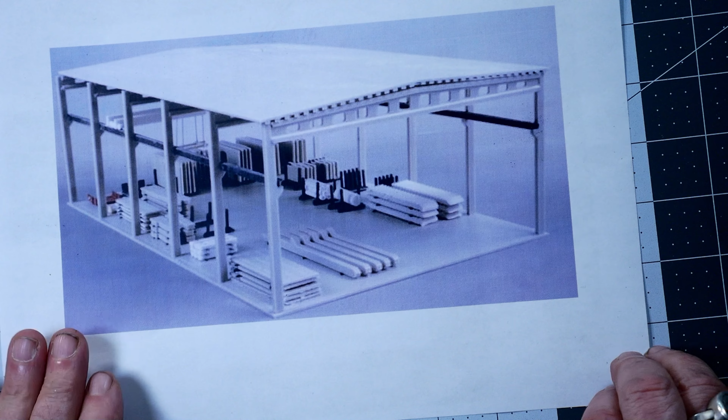Which is honkin' expensive. Just give me a sec here, I'm going to tell you exactly what that is in currency. Sorry, there's dead air right now. Okay, 39 euros is $57.45 Canadian.

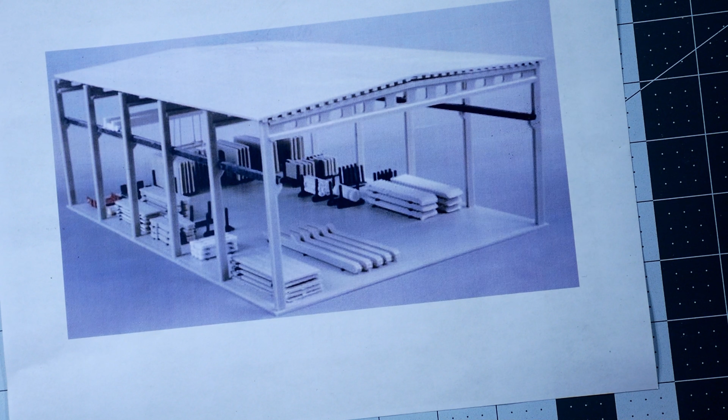That's an awful lot for a building I can build for $4 with a laser cutter. Of course, I had to buy the laser cutter, so it cost a bit more, but it gets used over and over for my buildings, because buildings are mostly flat panels. When I want curved parts, I usually 3D print those, but otherwise I'm building flat panel siding and other stuff for my layout.

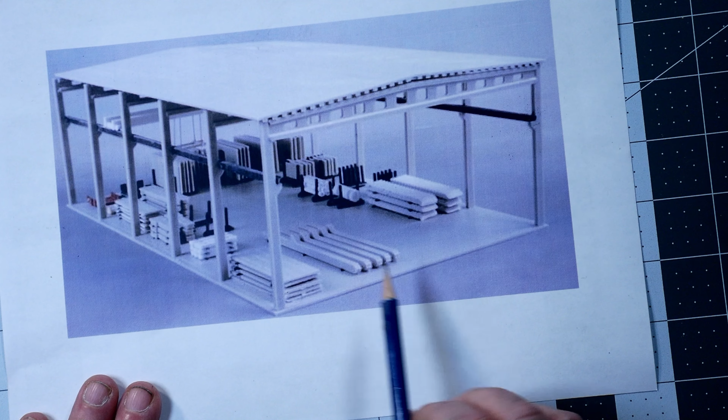This particular image caught my eye, and I thought, well, that's it. I think I saw on Ron's Trains and Things he had a repair in place building similar to this structure, and I thought to myself, why not do that?

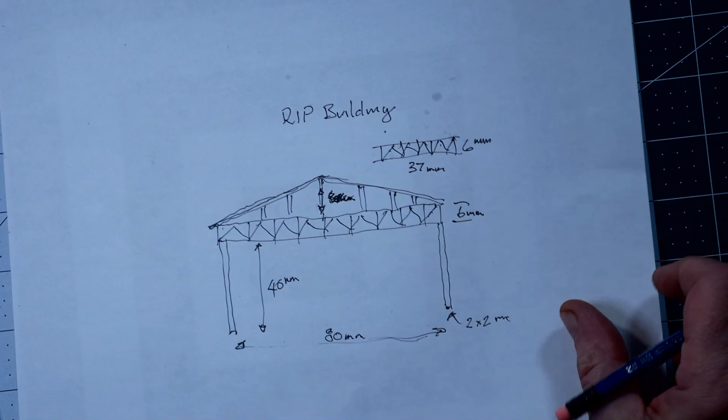So the first thing I did, and I'm just going to switch out the paper here, was make a quick sketch and decide how wide it had to be. In order for it to go over two tracks, it has to be 80 millimeters. Sorry, yes, it's 80, just have to check on a ruler here.

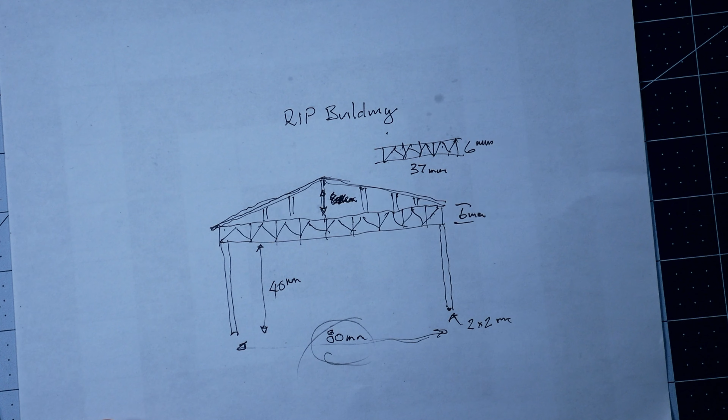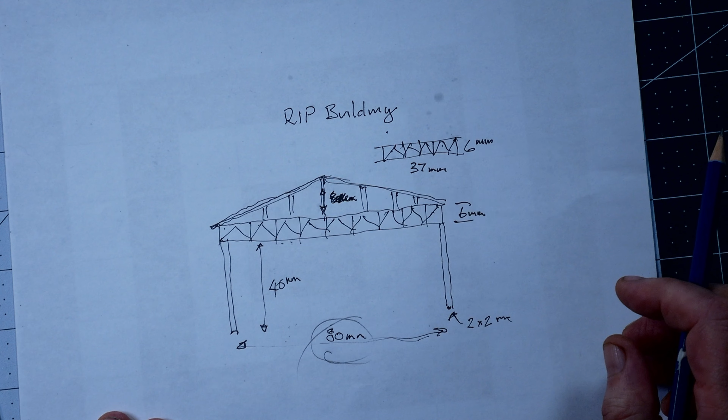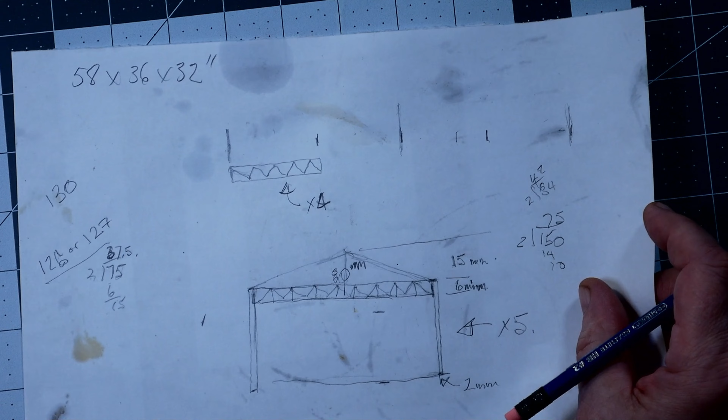In order for diesels and rail cars and rolling stock to go underneath, from the ceiling or the girders to the ground has to be 40 millimeters, sorry, millimeters not centimeters - we're looking at N scale. So I did this quick drawing, actually twice. I did it once in pencil, then thought you wouldn't be able to see the pencil much, so I did it over again in ink.

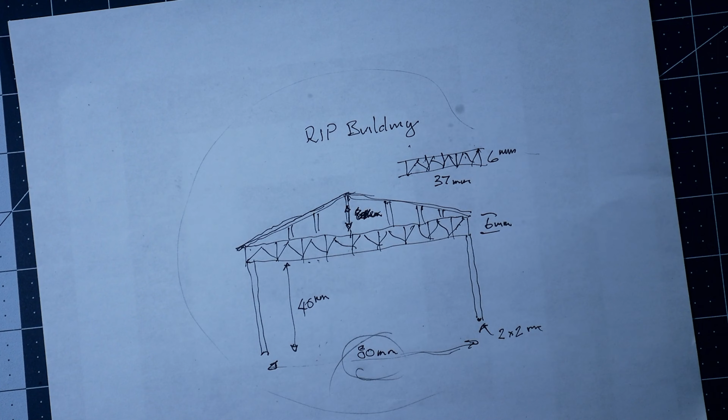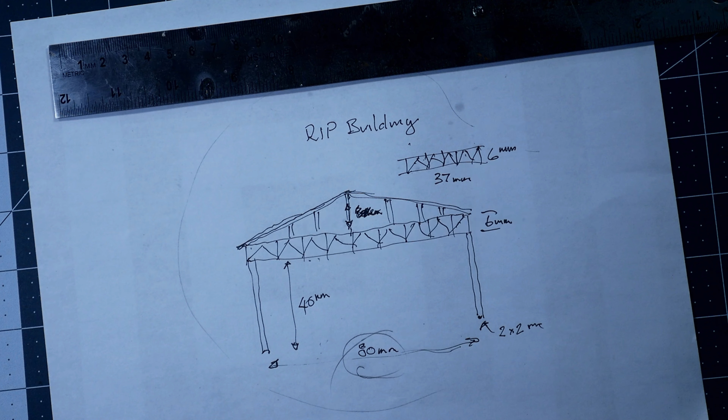There are a couple tools you'll need to do this. First off, you'll need a ruler in centimeters, an N-scale ruler, some calipers, and I think that's all you really need for this job. And of course a pencil and stuff like that.

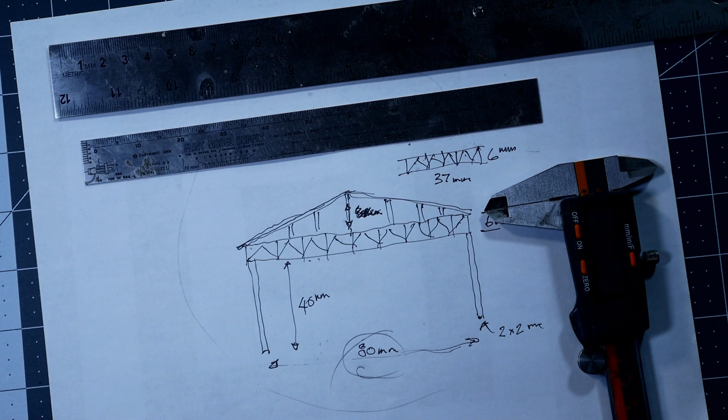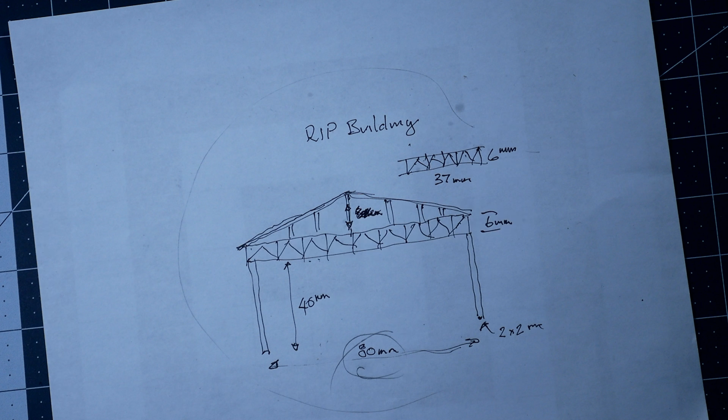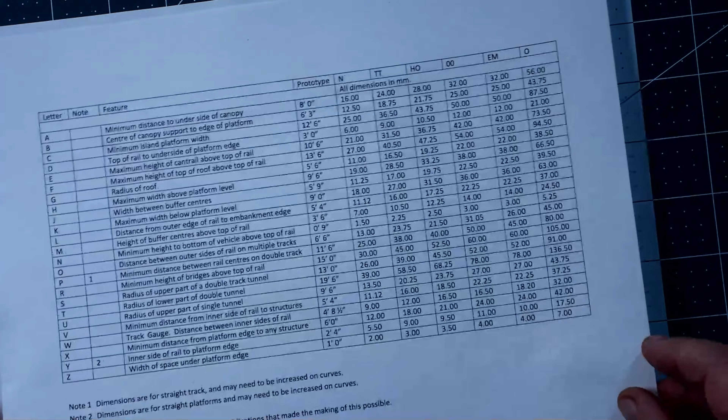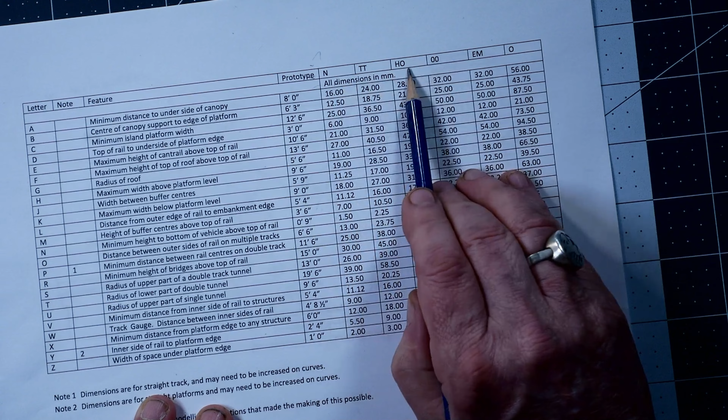But anyway, one of the first things I wanted to do was make sure all my clearances were correct. On Railway Scenics, which is a UK company, they have a free download, and I'm going to sit it here for you - a free download of all the dimensions you need for clearances for rail cars. These are all in millimeters. They provide a chart that goes with the diagram, and the chart has prototype distances, then N scale, TT, HO, OO, EM, and O scale.

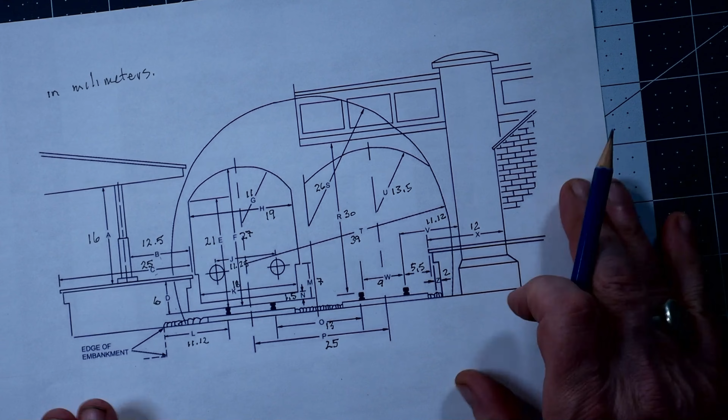So you can take this and do what I did. I took all of the N scale sizes and wrote them beside the corresponding letters. Now I'm either going to laminate this, or do something with it to keep it good, because now I have a reference for everything I build on my layout. That's why I got this chart, because I wanted to make sure I wasn't going to make a mistake here and waste material.

Now, wasting material - like I say, the whole building cost $4. I bought 1/16 sheets of basswood on Amazon, and I used that as my structure to cut out the building. Now the building is already cut out - I did that already, I'm not going to show you that.

I may demonstrate the laser. I do have a time lapse somewhere of the laser cutting things out, but we'll see how long this thing is before we start throwing in a time lapse here. So now I'm going to bring my computer down here, switch over to LightBurn, and show you how I do this - just so you get a quick tutorial and see how easy it is to do.

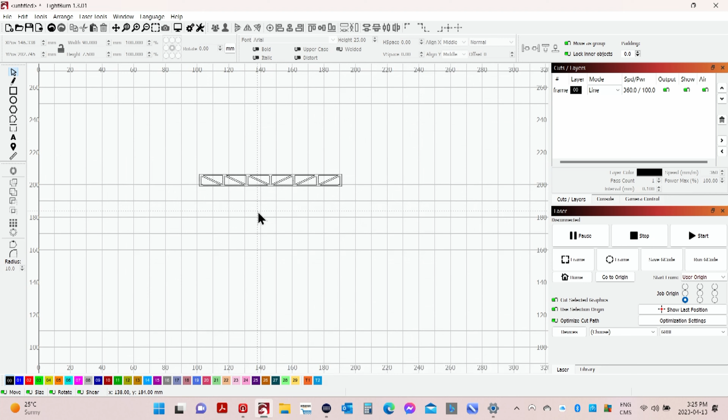A while back I made, I needed a set of trusses for a building that I was building. I believe it was the large shallow warehouse factory that's sitting on my layout in the yard, and I didn't want to go back and repeat that, so I created this truss.

So what we're going to do is look at my dimensions, and I'm going to zoom in a little bit so you can see it better now. I'm going to pick the tool, and pick it. Okay, so it's 90 wide, which is bigger than I need, so I'm going to change that to 80 and press enter, and that moves it in, makes it a little bit better. And I need it to be 6 millimeters tall. This is from the dimensions in that diagram that I got from Rail Scenics.

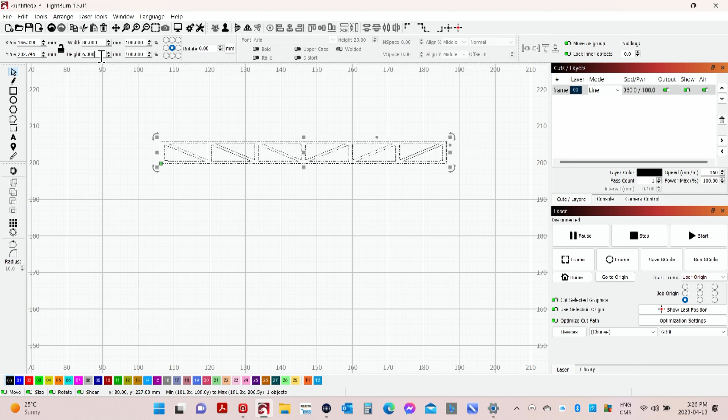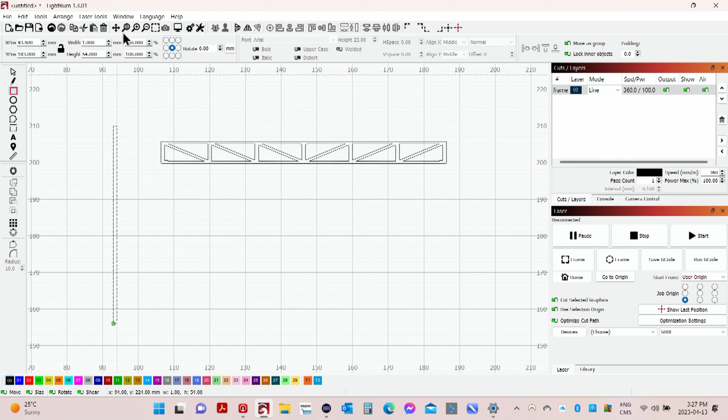So that's the start. Now I need 2 legs on this thing to keep this girder above the track. So I'm going to pick the box tool, and draw a box. Now I need it to be 2 millimeters, so I'm coming up here and change it to... there, 2 millimeters and 40.

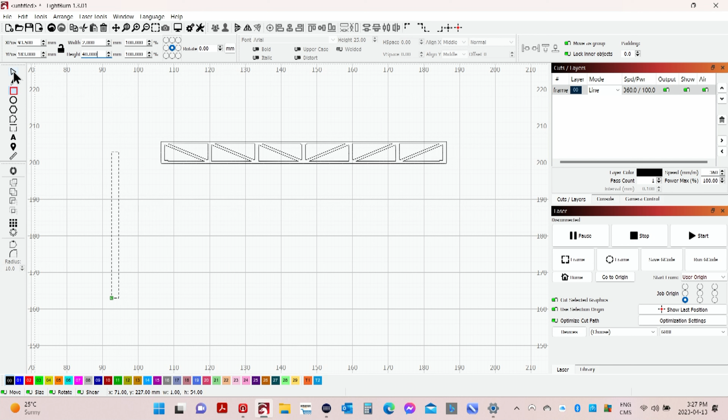Press enter. Okay, so now what I want to do, and we're doing this real quick so I'm not going to spend a lot of time here, is go back and take the pick tool, and move this over here, and zoom in. And I'm just going to overlap this upright with the girder.

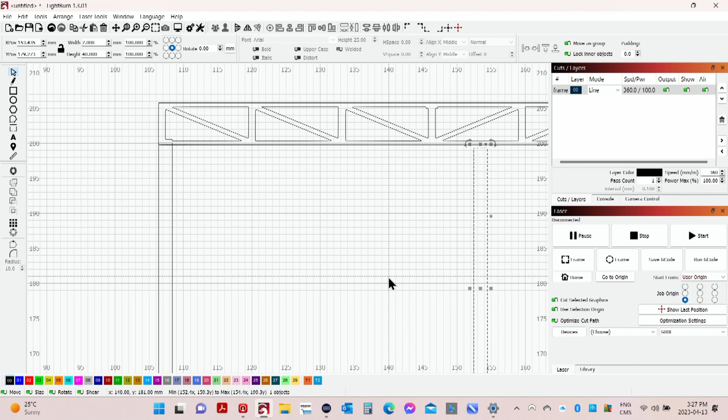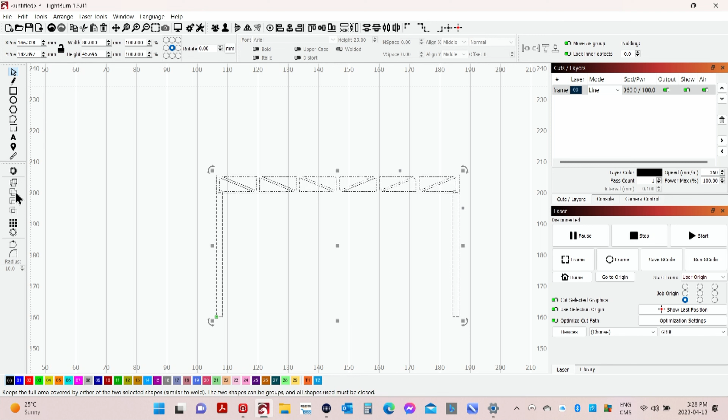And now I'm going right clicking on here, and I'm duplicating that leg, so I get exactly the same thing. I'm going to scratch it over here, same deal. Now I'm going to select all of this stuff, and click, and that has joined the legs to the girder, so it's one piece. So when it cuts, the laser will not cut the legs off of the girder. The girder and the legs are now one piece.

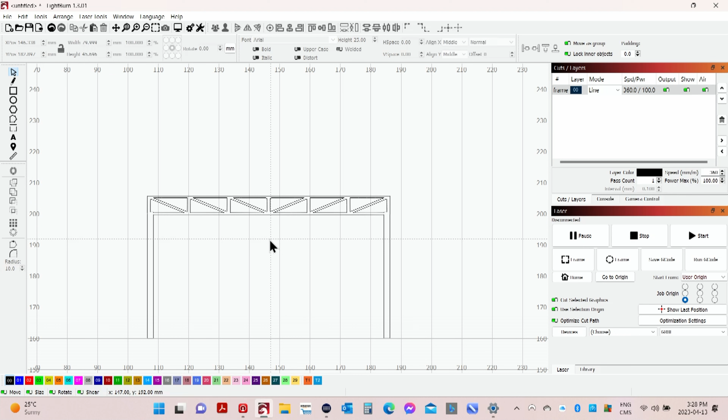So the next piece to do, of course, is the roof. I'm just going to grab my little thing here, and line it up with the grid so that I've got a line. Okay, let me go here again. Click, I'm going to zoom in. That's what I need. I need to be able to see this one here. And there we go, that's what we want.

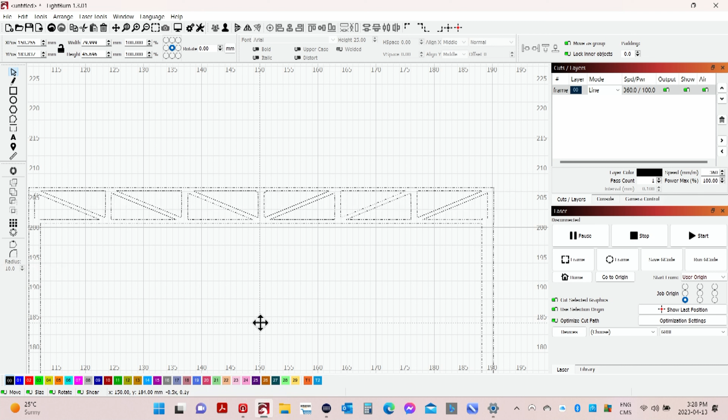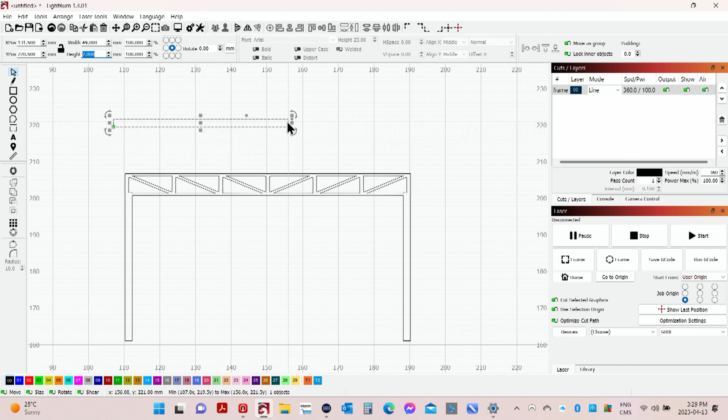So that now has centered the first piece of the structure on the grid that's part of Lightburn's desktop. So the next thing again is to click and create, and now we go here and go to 2, press enter, and what we want to do is rotate this and bring it down.

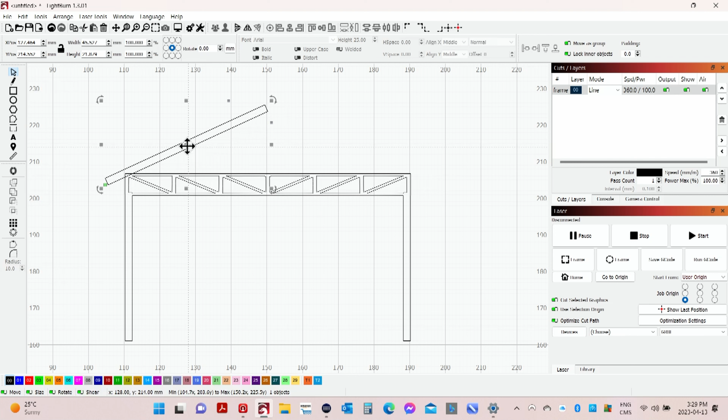I'm just going to do that, and then I'm going to duplicate this, and go up to the Arrange menu, and I am going to flip this horizontally. So now I have another roof girder.

And I'm going to line this up. Now, same deal again, I'm going to pick everything, and now the roof support is now also part of the truss and the legs. So it's all one piece.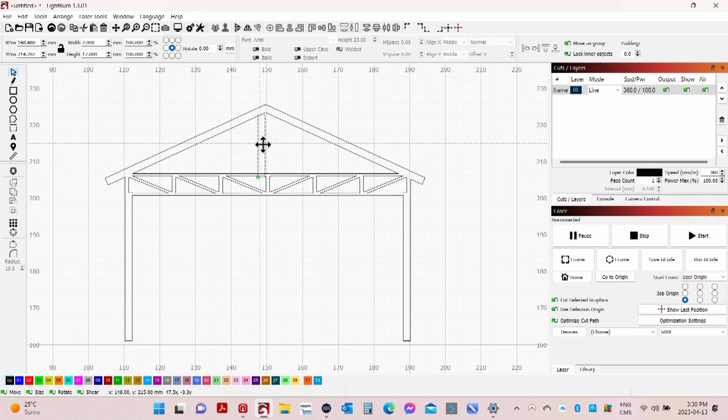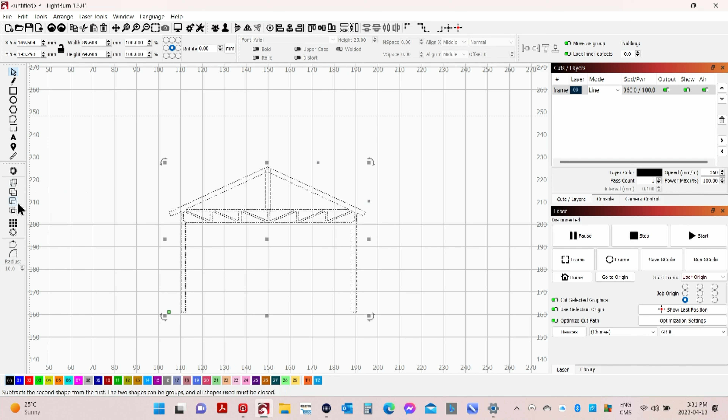And then we just got a couple more pieces to put in, and then we're done. So this one is 2 by 17, so we're going to take it here and just zoom in, move it down a bit, make it a little longer. Back it out again, select everything. Oops, wrong thing, Control Z. I think it's the one below here. There we go, so now that's part of the roof truss.

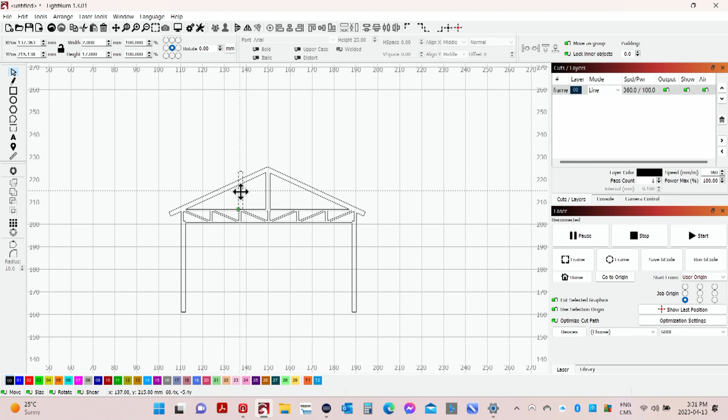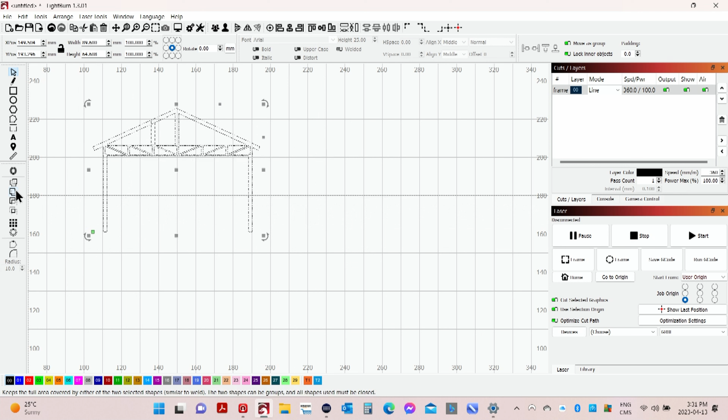And then we'll do it again, 2 by 17, and we're going to make this smaller. Let's go scroll right in here, and come up here and make this shorter so that it's there. Now the important part of this with Lightburn is that these things have to overlap each other. And now that's part of there. And now we're going to do it again. Box tool.

The width is 3 and I want it to be 2. Enter. And I'm going to duplicate this one. Yeah, I'm going to duplicate it so I don't have to go ahead and do that again. And here, duplicate.

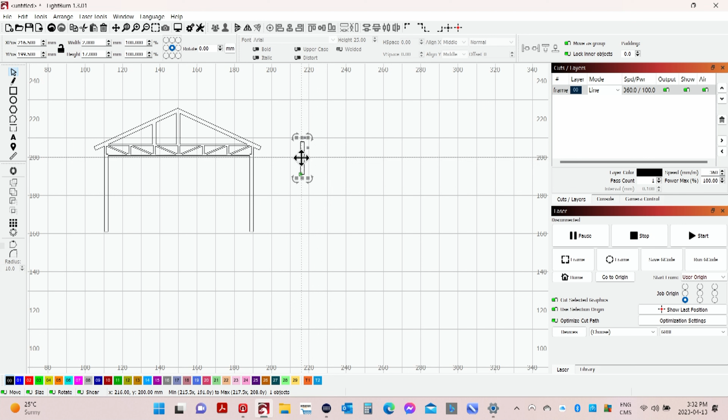Zoom in again. Move it up and overlap. Move it down and make it overlap it. Zoom out. And that's now part of it.

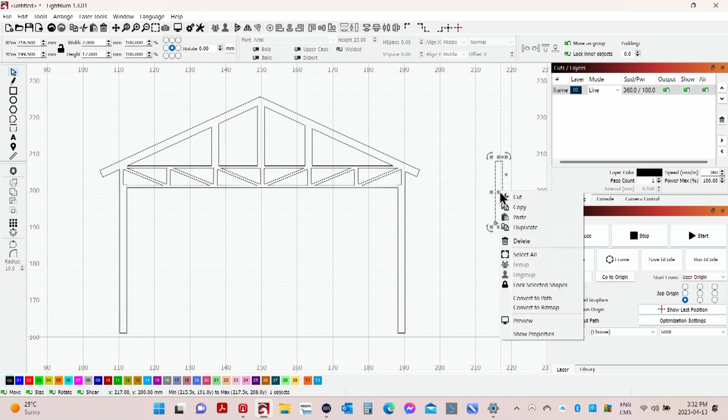Now I can just take this one, duplicate it, come over here, line that up there. Now again, I got to make sure I overlap it completely. Right? Back out.

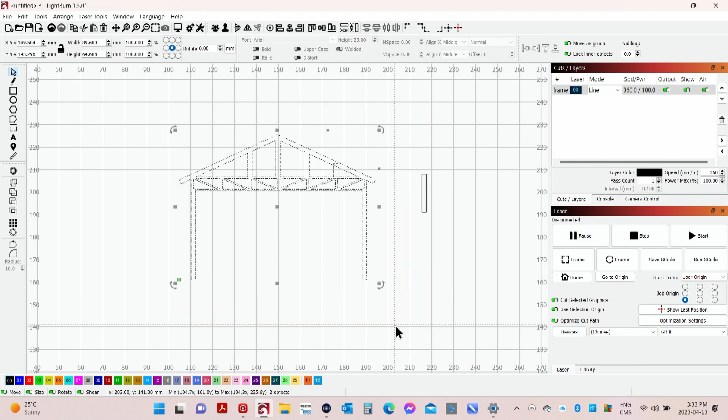Now there might be a faster way to do this. I'm not an expert in Lightburn. I'm just... and so this will be the last one.

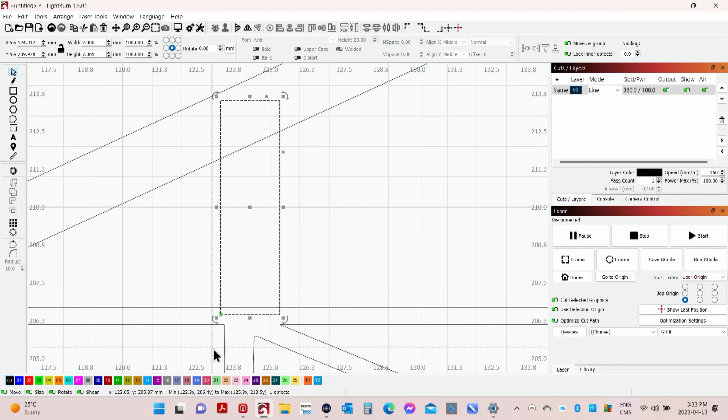Again, shrink it to fit. Zoom in to make sure that you are overlapping. But you notice that it is overlapping and overlapping here. So now I'm going to zoom back out.

Let's pull it down a bit. Pick tool is what's picked. Here we go. Ching. And now we have one solid roof truss.

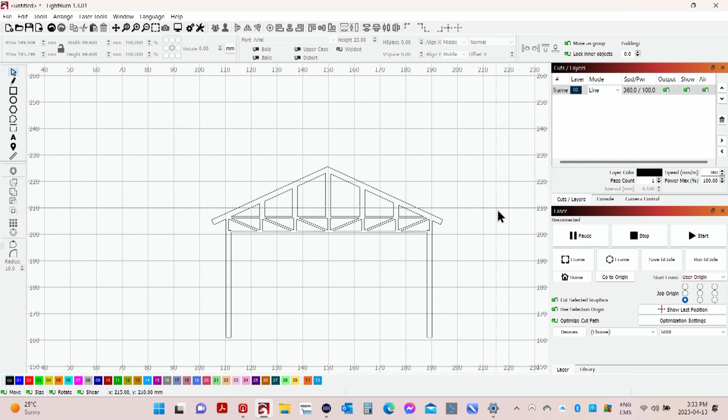So what I would do then, now that it's all together like this, I duplicate it. And now I can make as many of these as I want.

I settled on a building that's 150 centimeters long, which is long enough for a diesel or a piece of rolling stock to sit completely underneath it. And in order not to waste lumber...

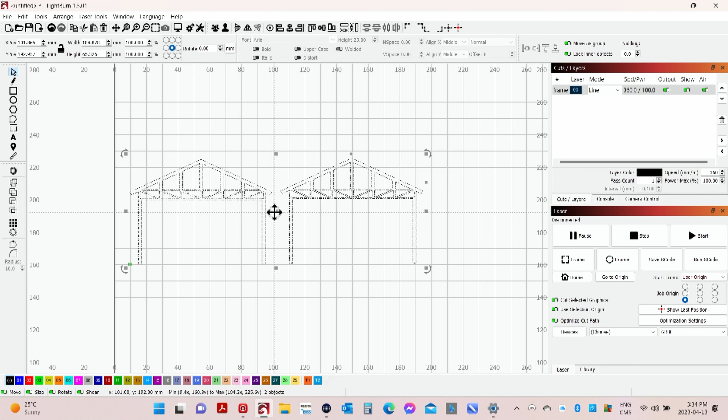I'm going to group this. I'm going to just put them together as a group. That makes it a little easier to use. I'm going to duplicate it. I'm going to bring it down here like this. I'm going to grab the corner, turn this upside down, and this will save me

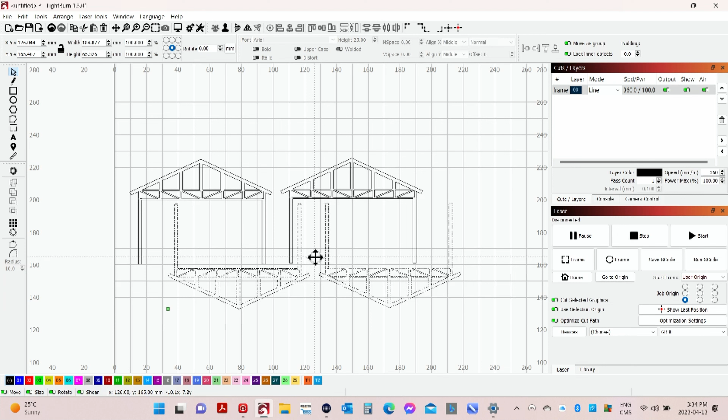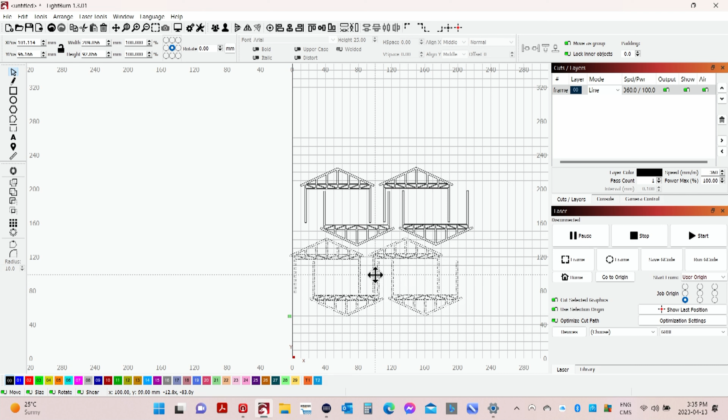lumber. Now when I do stuff like this, I always make more than I need. So I'm actually going to now take this whole group of 4 and duplicate it and bring it down like that. So that gives me more than I need, and all the trusses will be identical.

So what do they look like? Well, I'm going to put a piece of paper on my keyboard here, and I'm going to grab one here.

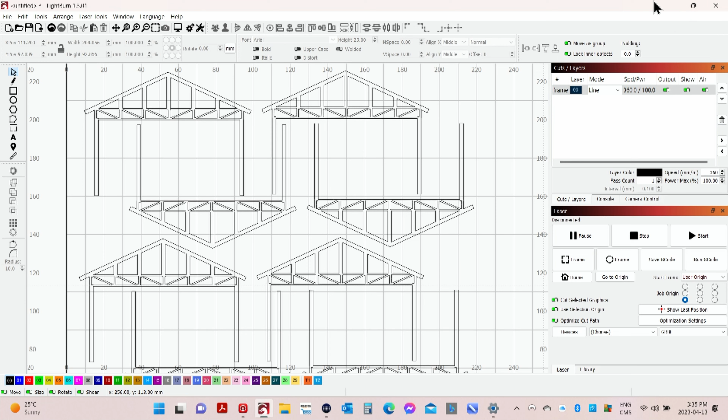So I'm just going to let LightBurn off the screen here, click on my switcher, and go to camera 6. Camera 6. And so here you are. Here's the truss cut out. And I also, when I was doing this, and we'll go back to LightBurn for a second here.

And I'm just going to, I'm trying to figure out where we went. Okay. Oh, I know what I did wrong here. Okay. Click here. Go to 6. Cut to 6. That's that. Cut to 3. That's that. Now, bring LightBurn back up.

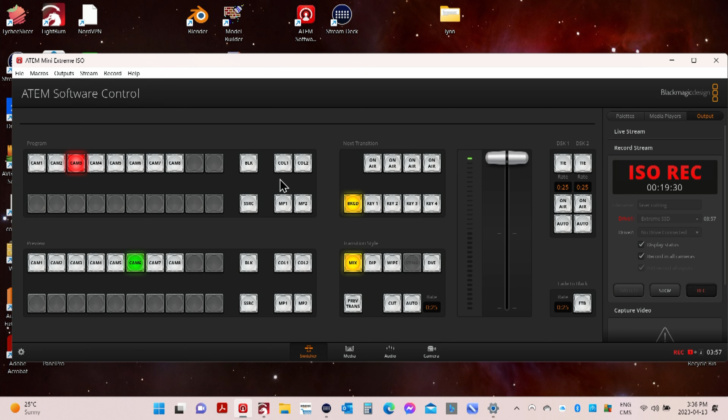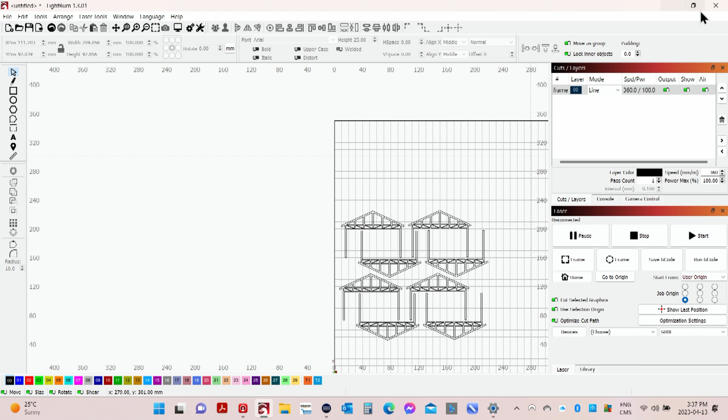So what I also did when I was doing this is I also cut out all of the little trusses that go with it. That'll join all of these together. So, for a moment, I'm just going to cancel it. I'll come back and play around with that in a minute.

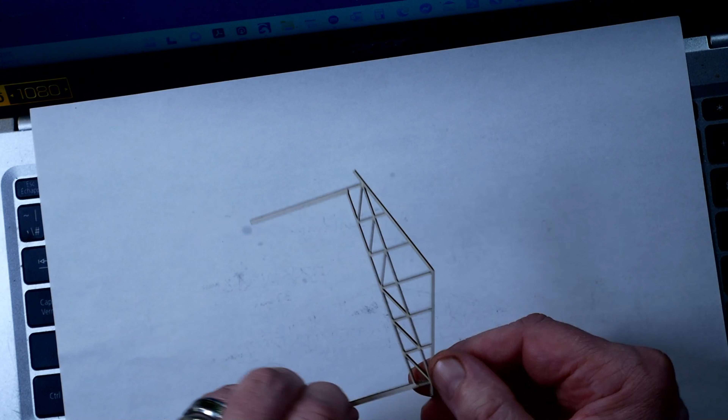So you can see it's a small truss. It's all cut out. It's very rigid. It is structurally rigid. And so all I really need to do now is to cut some flat sections for the roof and put it together. And that's what we'll do next week.

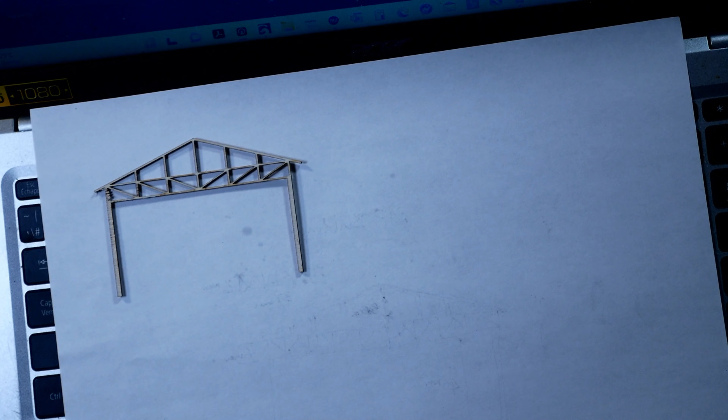We'll put this together. And I'll show you how I go about doing that next week. But I thought for this week you'd like to see. Now,

like I say, because most buildings are a flat wall, one of these little diode lasers will cut very thin material, and it would be good for HO, even O, I think, if you got thicker materials. But I always try and get thin materials because of the scale. That way, like the posts on this are 2 millimeters by 2 millimeters.

Here's my calipers. So there, it's actually 1.85 by 1.84. So it's 1.8, basically 1.8 square. And that's if we go to my N scale ruler, that's about 1 foot, which would be reasonable for a steel beam holding up a roof. You can go finer than that, but the finer you go, the harder, more difficult the problem of cutting things out becomes.